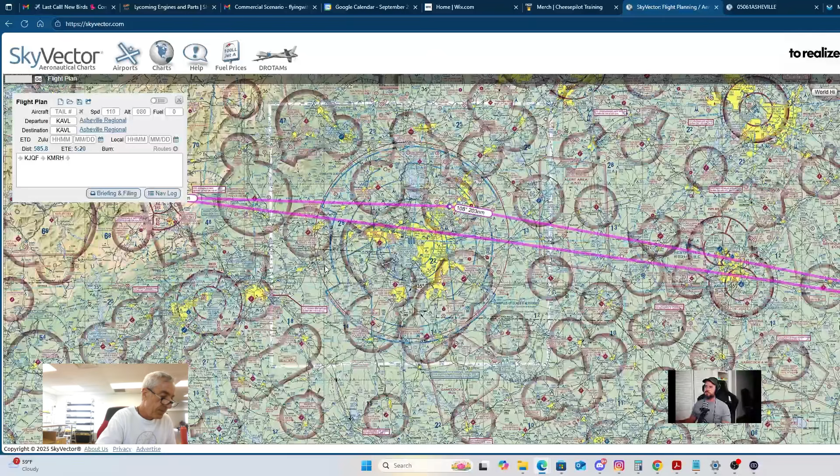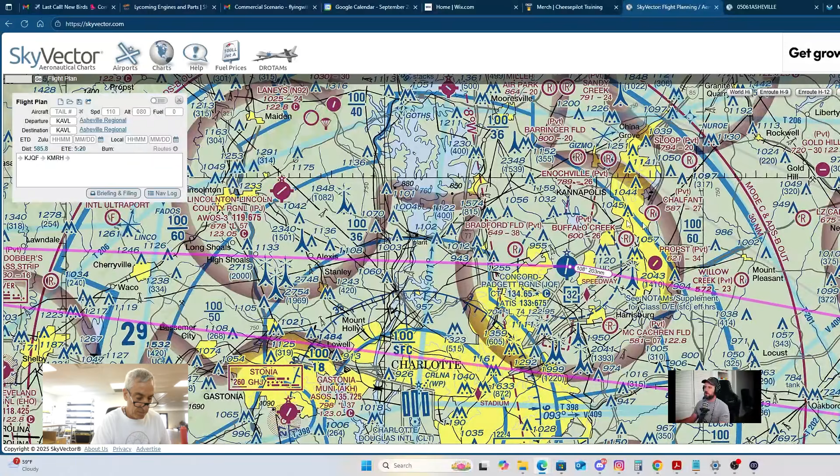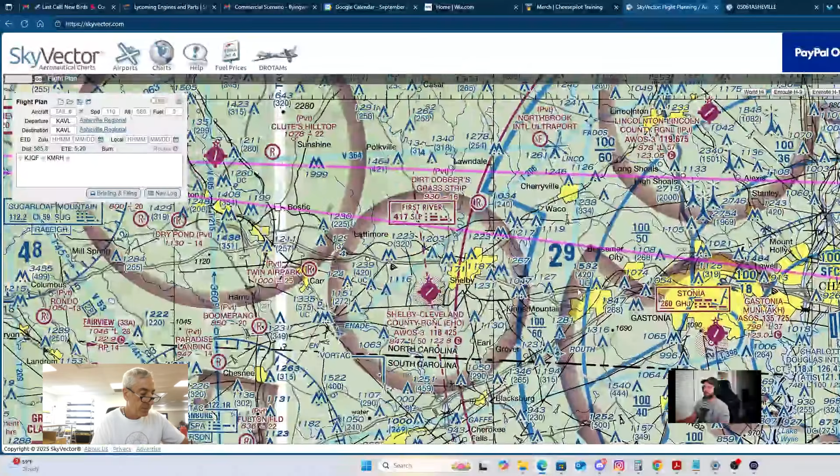Yeah, so I pulled it up on SkyVector. Given the GPS waypoints and stuff, it's kind of hard for me to put those into SkyVector. But this is effectively the route. You're going Asheville solo to, was it Sugar, Bradford? Oh no, Concord. Correct, Concord. You're picking up your buddies and going to MRH, and from MRH all the way back to Asheville. Correct. Okay. Go ahead.

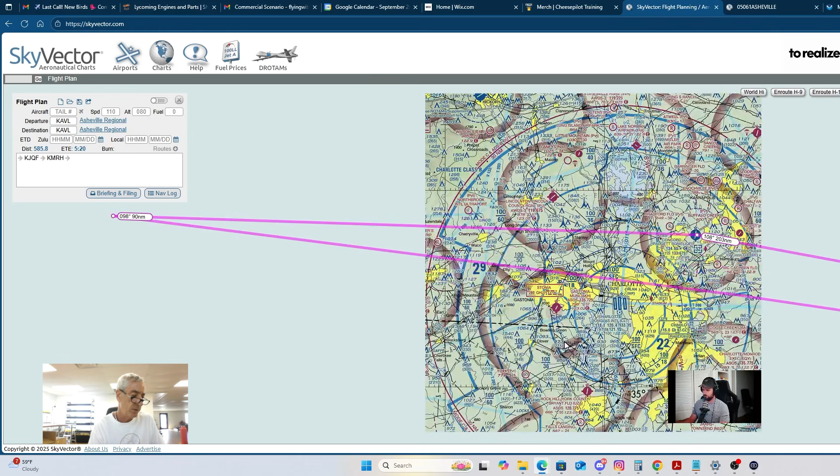And you see that you've got a Charlotte Bravo airspace right there above Concord. So that's why I took a route from KAVL to Sugarloaf VOR to BZM VOR, and then I figured they're probably going to vector me around anyways, because of the Class Bravo airspace. Okay. And what was the identifier of the Sugarloaf VOR again? Sierra Uniform Golf. Sierra Uniform Golf. And there it is.

Bravo Zulu Mike is your BZM, Barrett's Mountain VOR. Okay. And then I just set up some pilotage points, like, after I cross BZM, I'm going to turn right. I haven't looked at the heading, but it's probably a heading of 100. I've got Statesville there. Statesville's a little town. That's a good pilotage point. And then I've got railroads.

And then I figured they're probably going to, at a waypoint of Pigeti, vector me around, and they'll be in full contact with me, ATC. I always pick up flight following, so I'll pick up flight following with Asheville.

So yeah, that's why you see all of those longitude and latitude. Yeah. No, and I mean that's fine. Did the DPE specifically state like, hey, let's keep this VFR plan? No, he did not state that. But I just figured it probably was going to be all VFR.

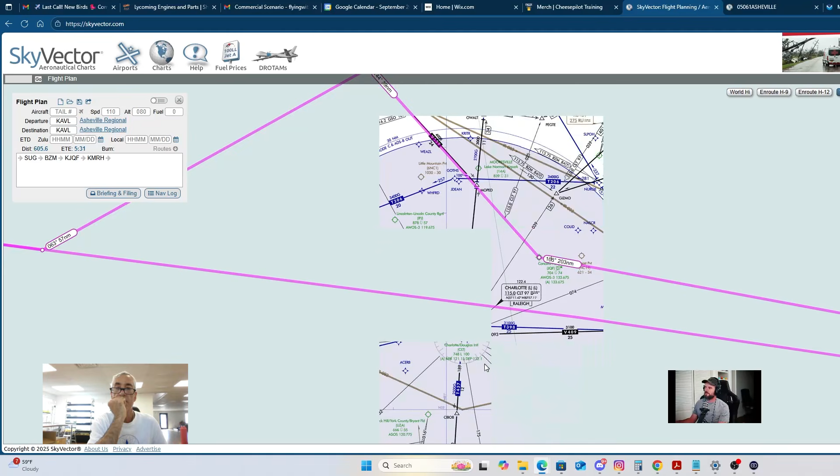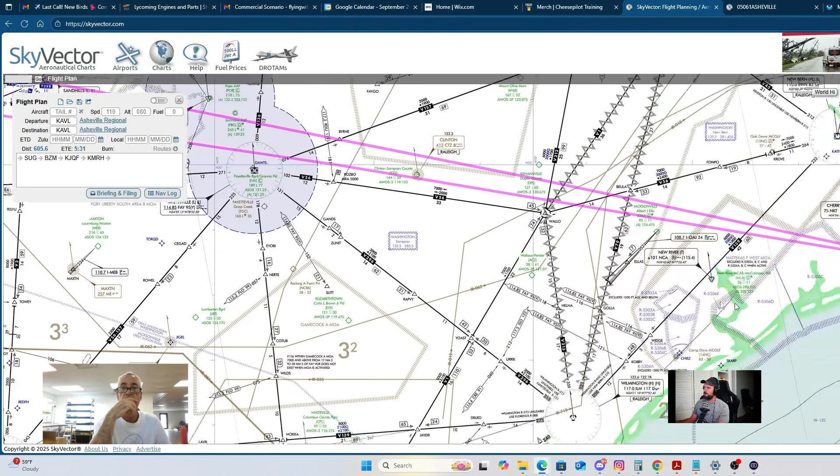I mean, with a route like this, I would have planned it IFR. Even if there is VFR weather planned, I probably would have done an IFR planning, because you're not trying to do a VFR-only commercial pilot certificate, right? You're trying to get a commercial pilot certificate that also includes your IFR privileges. Plus, there's a route that takes you pretty much right there. Correct. And there's even a route that'll pretty much take you all the way out to the other one. My personal preference would have been to plan it IFR. I see why you did it VFR.

Because, like, hey, commercial brings us back into the VFR world. We're doing all these VFR maneuvers and whatnot. Commercial is more looking at your decision making. It's less, oh, this is a VFR only ride, or this is an IFR only ride. It's kind of bringing it all back together. What is your decision? What is your choice?

Right. And if we're going to be circumnavigating Bravo and whatnot, I would rather be on an IFR flight plan that's going to get me in and out of Bravo easily, instead of trying to duck under all these different shelves and hope that they're going to give me a VFR clearance through the Bravo. Because if the Bravo's busy, they can tell me pound sand. Correct. If I'm on an IFR flight plan, exactly.

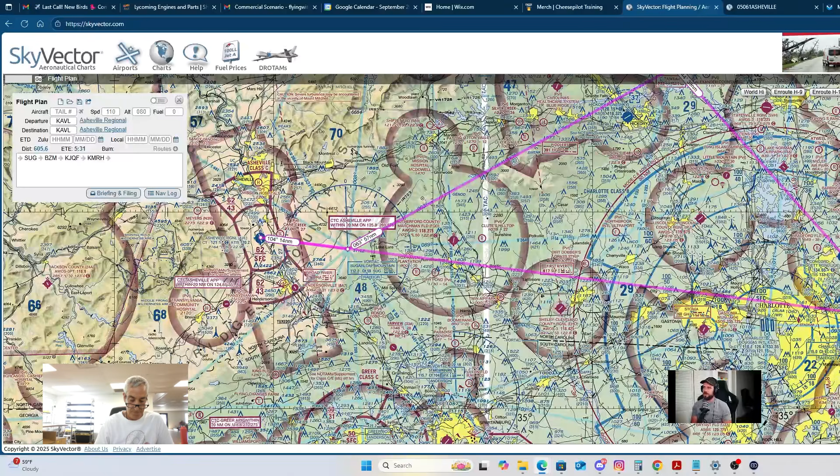Yeah, I didn't know I really had a choice. It didn't seem like that on the commercial side because everything was VFR. So that's good to know, though. Yeah, your maneuvers are all VFR. If the DPE wants VFR cross country procedures, it's very easy for them to take you off your plan, like, oh, we lost communications or something. It's very easy to build a scenario to get you out of the IFR environment.

But what we're looking for is, let's say somebody did approach you at the airport saying, hey, I need you to do this commercial flight for me. I need you to get me from point A to point B, point C with some cargo, blah, blah, blah. What's your planning behind it? Yeah, and the first question is, is it a business? It's cargo I'm picking up, business related. And if so, so on and so forth, like you said.

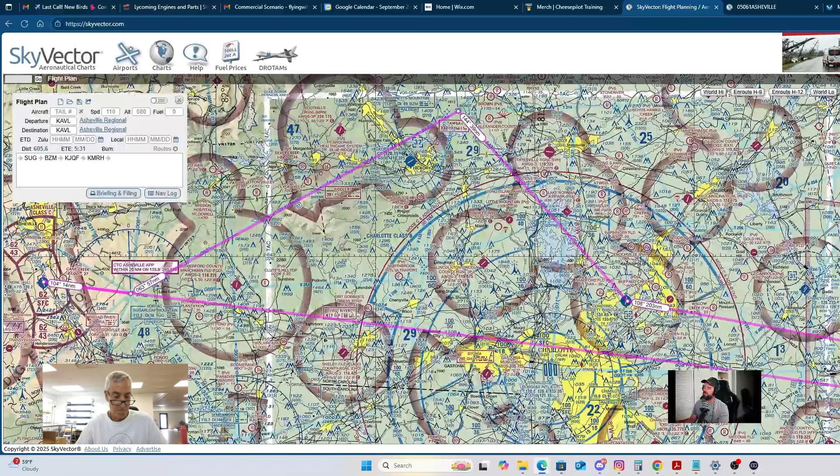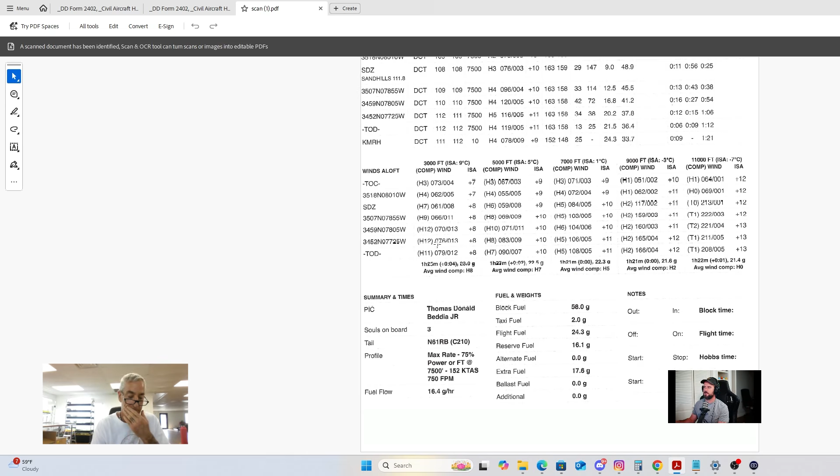Yep. But it wasn't a bad VFR flight plan. You get a decent altitude, 7,500 feet was the plan. Let me see if I've got it kicking around here somewhere. I did have some notes on it. I even wrote in the missing 185-pound friend, but we already talked about that. You had your intention, your top of climbs, top of descents. Again, these are ForeFlight generated, because at this point, what are we bothering?

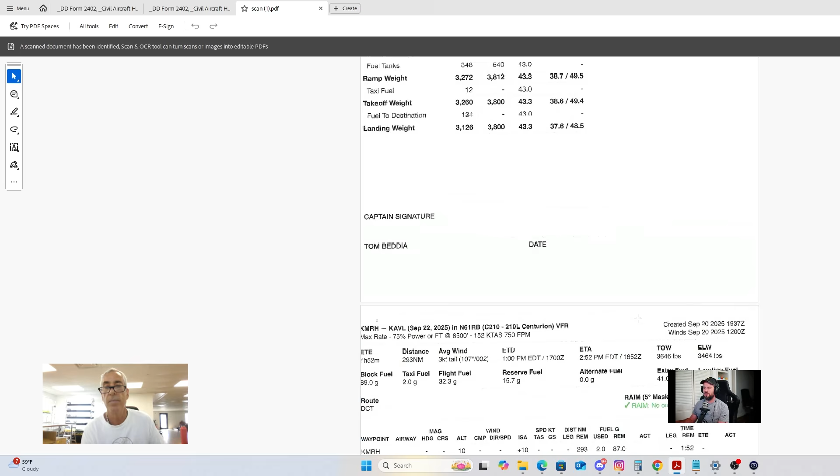The one thing I did see that might be a point of contention was the fact that you split the cargo at the end. Would it have been possible to not split it? Because if somebody's ordering 100 pounds of oysters, usually it's going to be in some kind of crate. Right, because the maximum weight that I can actually put in the rear cargo area is 100 and something pounds. Let's see, it's 120 pounds in the aft cargo.

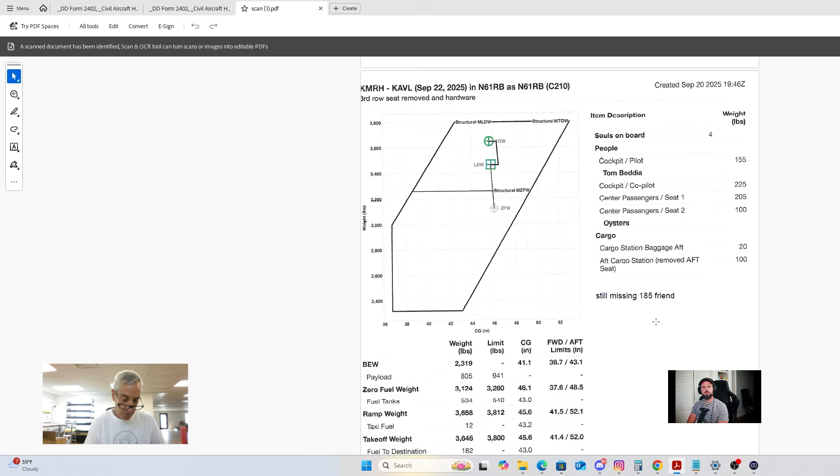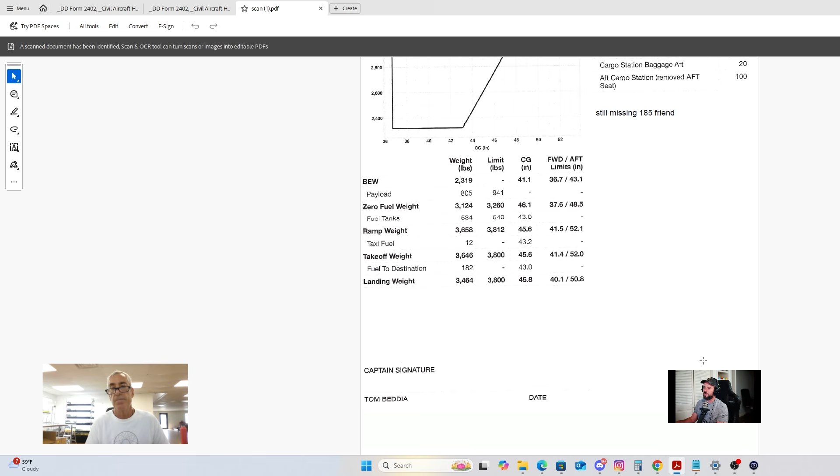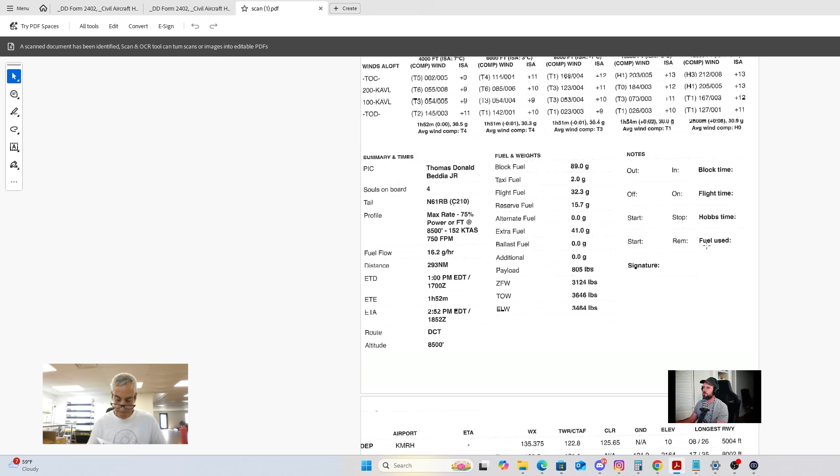Okay, so it was necessary to split the cargo, and that's probably another limitation they want you to recognize in the Cessna 210. Are they able to recognize that they can't just shove 200 pounds in the cargo? Correct. Awesome. So solid decision making when it came to getting rid of the friend that wanted to come along just as a joyride. Solid decision splitting the cargo.

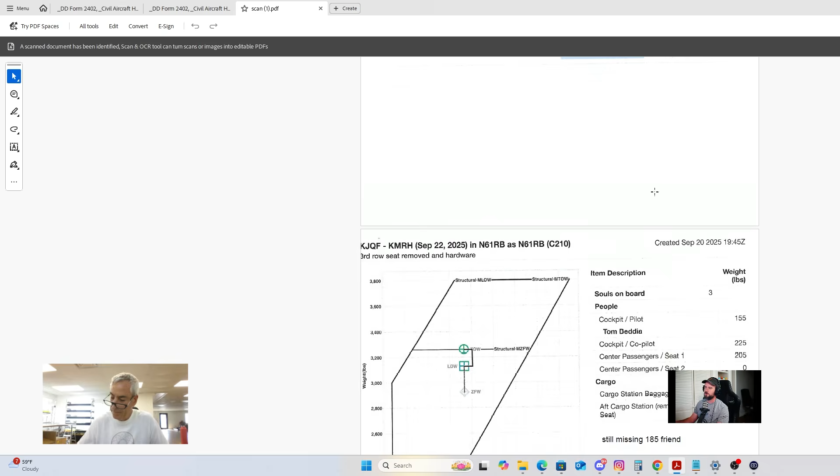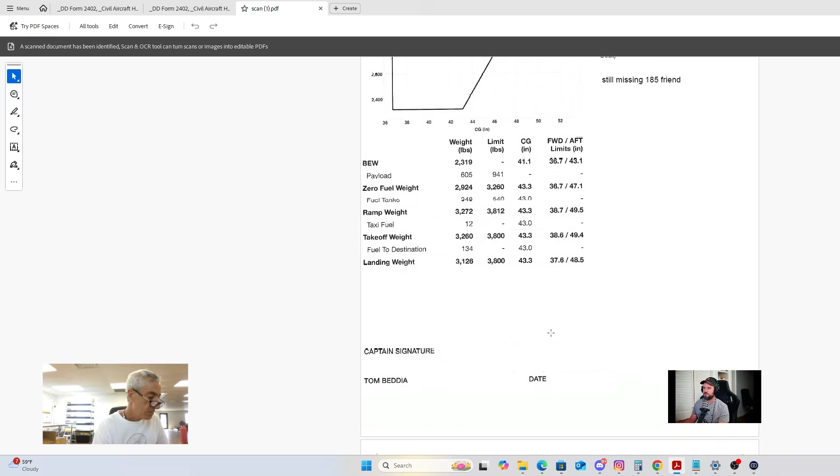I wouldn't have done it VFR. I would have done it IFR, especially circumnavigating a big old Bravo airspace like that. It would just make it less work for you, is really what it is. Correct, because they'll clear me right through it, most likely. And even if they don't clear you right through it, how much fuel were you going to burn for this route? Let's see. Flight fuel, 32 gallons out of the 89 that you planned for. So it's about half your gas. You still got, what was the time?

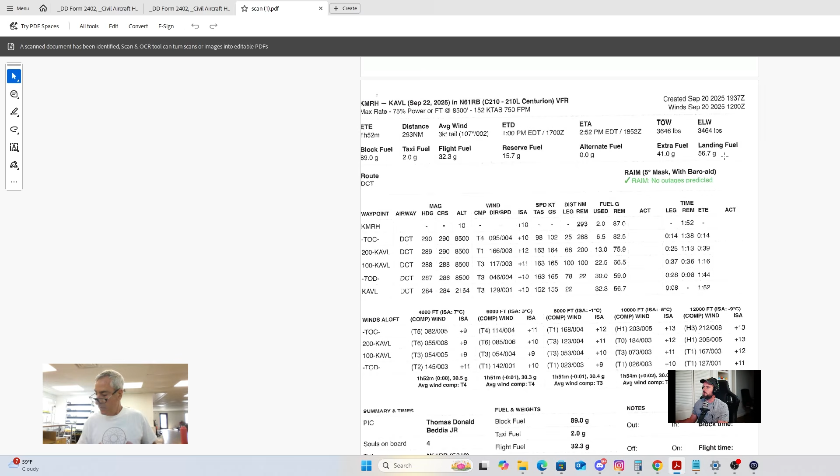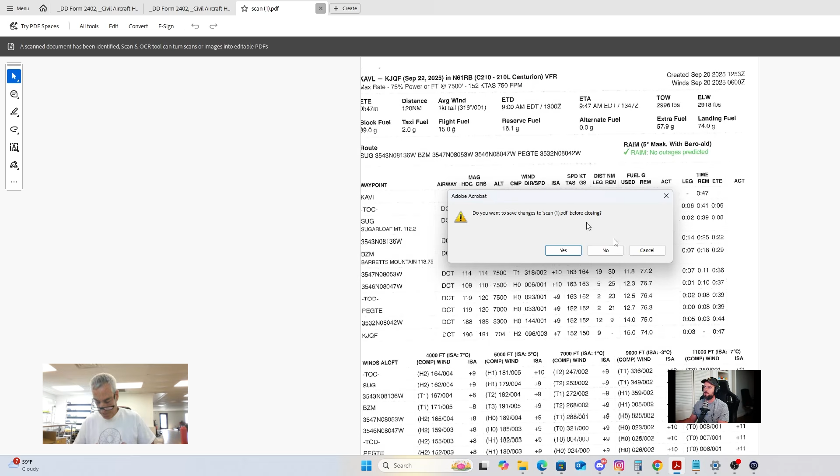Extra fuel, landing weight. I had 2 hours, so you still had another 2 hours of fuel. So I wouldn't say that you're obviously being cautious with fuel, having extra fuel isn't ever a bad thing. Just keep in mind that, I mean, you're not actually going commercial. You're just doing this to kind of make yourself better. Right? If I remember correctly. Mm-hmm. Definitely.

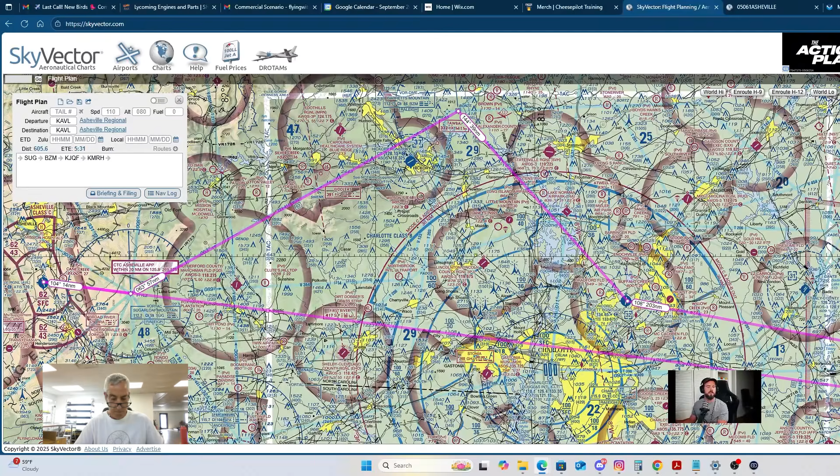What I would say is, I like your plan. You're cautious on fuel. You're more cautious than me, but it might be a matter of experience, or just you'd rather make that extra fuel stop. Yeah, because basically, I'm just picking up fuel in Beaufort while I'm getting the oysters. So I mean, it's like just top me off while I'm here. Yeah, and that makes complete sense.

I didn't see any NOTAMs that would give you any issue. The only NOTAM I saw was that there was a departure procedure out of one of these airports that you need RNAV because the VOR is out of service. That's probably Sugarloaf. Sugarloaf. SID out of Concord because the Sugarloaf VOR is out of service. So there wasn't really any NOTAMs that I would have been too concerned about.

I know when I checked the weather, I was thinking that we were planning this off of today's weather. I was a little nervous about the VFR only because there's a lot of bad weather going on today. But if this was based on stuff from days ago. Yeah, it's probably on the East Coast. The weather on the East Coast we got to worry about because you got all those tropical storms pushing up through there. Yeah, I mean, right now at AVL, it did get a little bit better. Well, MRH scattered at 1700. Oh yeah, it did get a little bit better.

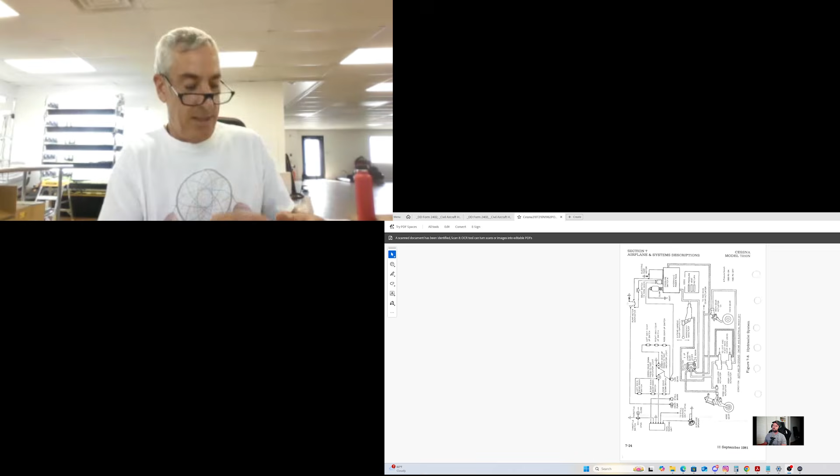We'll even show the viewers what we're talking about. So this is the POH, right? This is the gear. I just went and Googled a Cessna 210. It's interesting because my POH is like 50 pages, if that. I got my electrical system diagram, fuel system diagram, but it doesn't give me the gear system. Everything's all verbal about the gears, gear doors. Well, let's go over this one then, since I've got it up.

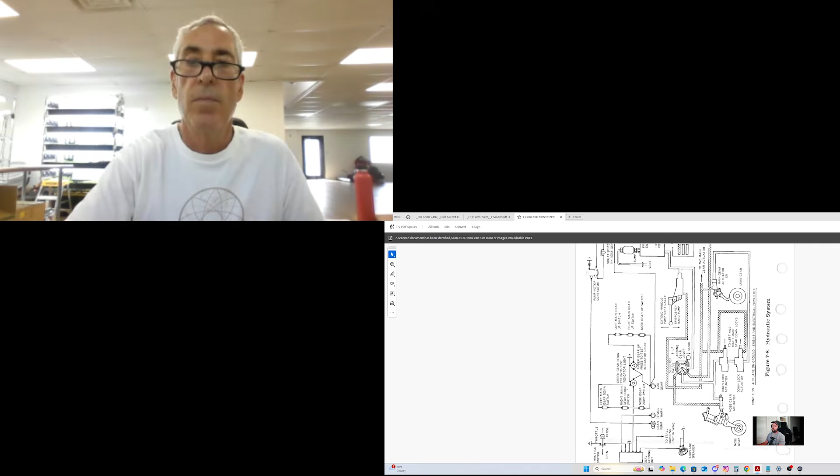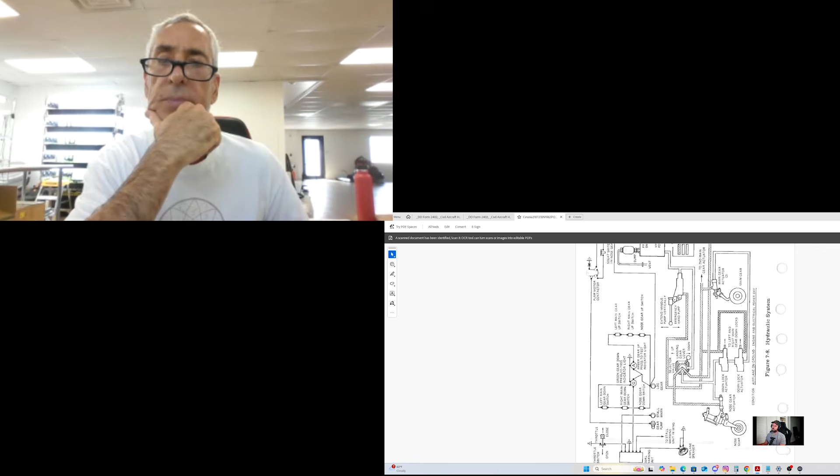They didn't change much in most gear indication systems, especially single light gear indication systems are all the exact same. The dual warning system is probably a newer thing your airplane doesn't have. But this is your gear uplock and downlock switches. You should be able to see these during your pre-flight, especially since your gear doors are gone, stick your head up there and see these little switches. Yeah, that's one of my pre-flight inspections, to look up in the gear bay area. And these little switches should be near your locks, right?

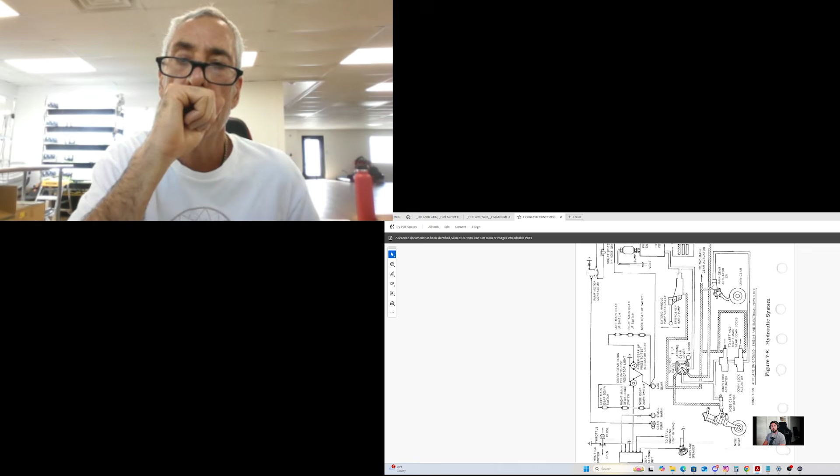So let's look at how they're wired together. They're all wired in series. So if I've got power that comes through this line and goes through all of these switches, if one of these switches has failed, will I get an indication to show me if my gear is up or down? No, it doesn't look like it. Yeah, because it'll break the circuit. It won't let the circuit continue. Awesome.

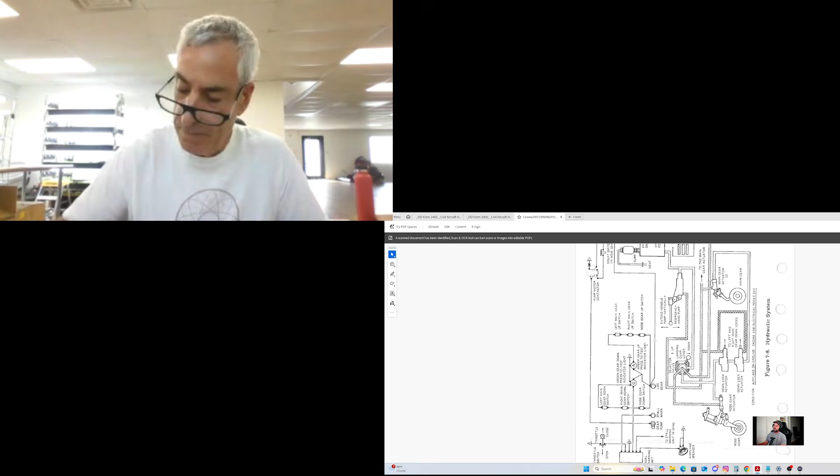Now let's go on the flip side and take a look at the hydraulics. So we talked about the electrics. If I was to talk about my gear system in this airplane, I would say that it's electrically controlled, hydraulically actuated. Would you agree? Correct. Because when you flip your landing gear switch, you're flipping a switch, not controlling a hydraulic valve. So it's electrically controlled. But then your hydraulic system comes in and does its fun little thing and actuates the gear.

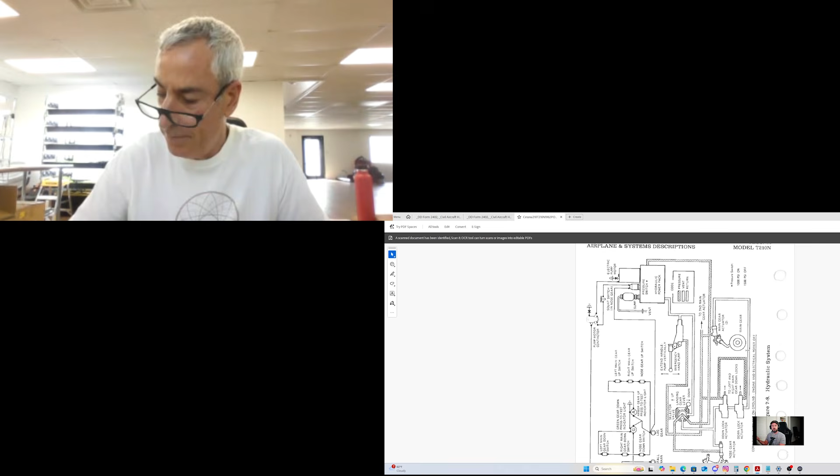Some airplanes, like mine, are hydraulically controlled and hydraulically actuated. When I swing my gear handle, I'm actually controlling the valve. My handle is the valve. But you have a switch. Correct. So you've got a selector valve right here. Do you actually have a handle that looks like this, or is it just a switch? It's just a switch. So you said you had an emergency extension pump. Do you have any kind of valve or switch that you actuate when you need to use this pump? No. Okay.

You can see it's pretty free flowing there. So let's say when you pull this handle out, when you pull out...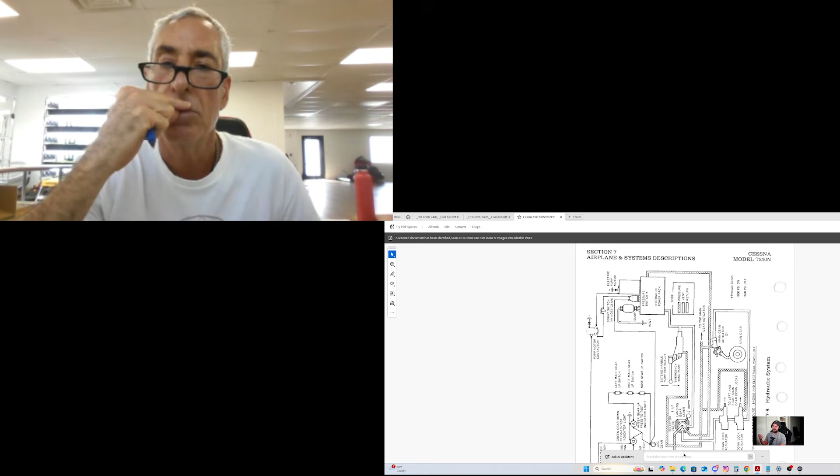I'm trying to think, if you've got an electrical failure, how are you going to actuate this gear? A lot of gear systems, right? If you have an electrical failure, let's say your alternator dies, your battery dies. How are you going to get this gear down?

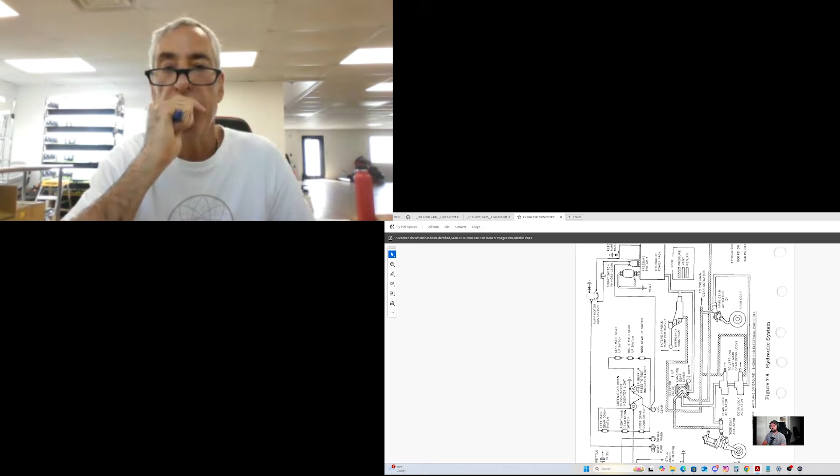The step I would take is I would put the electrical switch, which is the landing gear switch, right here, down in the down position. And then I would go ahead and pump it with the manual pump to get it down. It takes a while, it takes a little bit of time to do it.

So hydraulic system, see figure 7-8, supplied by an electrically driven hydraulic power pack located behind the control pedestal. The power pack only functions to supply hydraulic power for the operation of the retractable landing gear. This is accomplished by applying hydraulic pressure to the actuator cylinders to extend or retract the gear and operate the down locks.

The electrical portion of the power pack is protected by a 35 amp pull type circuit breaker. The hydraulic power pack is turned on by the direction of actuation selected by the landing gear lever when it's placed either in the up or down position. When the gear is fully extended and locked or retracted, a series of electrical switches will illuminate one of two indicators on the instrument panel showing the gear position. A hydraulic pressure switch will automatically turn off the power pack when the hydraulic pressure reaches a preset value.

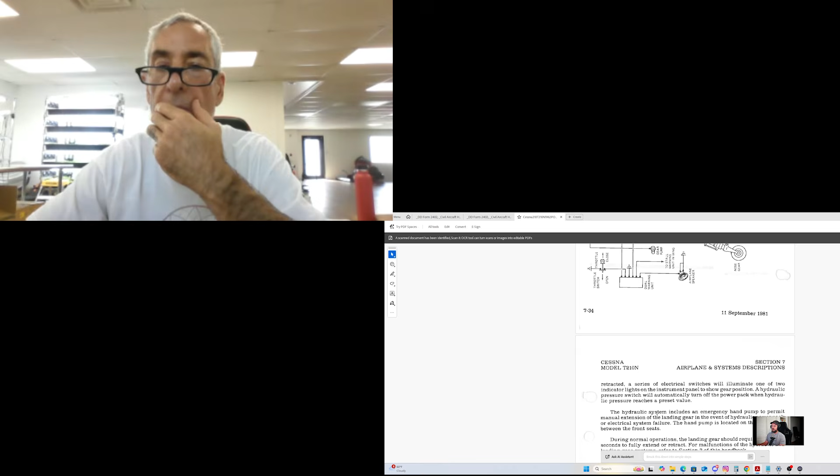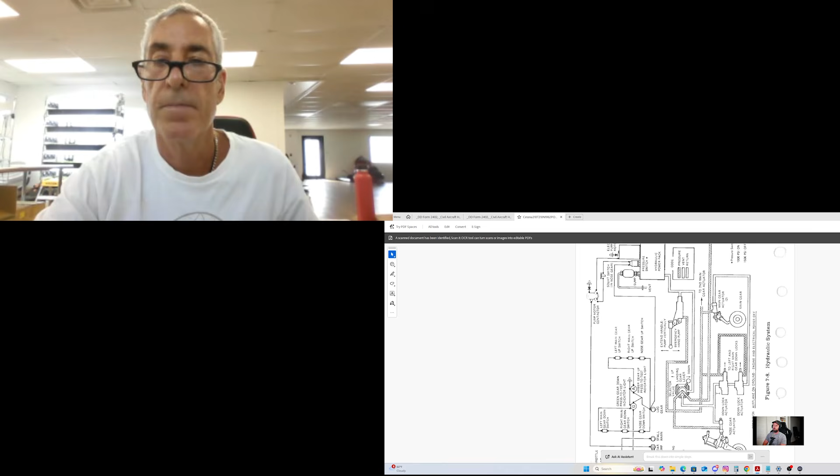Is that kind of what yours sounds like? Yes, it does. What it seems like to me is, based off of this Cessna 210 POH that I'm looking at, is that your landing gear switch and handle are the same thing. That when you throw that switch or handle, whatever it is in your airplane, it's an electric switch that tells the power pack to turn on. Correct, yeah, I see that. But it's also moving a valve directing the pressure to either the up or down side of the actuator. Would you agree? Yes.

I wish I had that schematic there in the book. That'd be nice, I'll share that. And again, this is a POH I just Googled. What I would dig more into is I would try to figure out exactly what your airplane has. Go talk to your maintenance, go talk to your mechanic, because this is the POH I found.

It's a 1982 turboed Centurion Cessna 210, right? So it is a different model than yours, but I wouldn't see that the gear system would be that much different. I don't think so either. But again, I've not been in your airplane.

But these are the kind of things that you should know, right? If I'm looking at a POH that's not accurate, you should be able to correct me and say, oh no, my airplane's a different model, my airplane has different systems, this is how mine functions. Yeah, I'm right there with you, I want to know more about it for sure.

So if you don't have the diagram, go look at the system, go talk to your mechanic. Your mechanic is going to have an idea on how this system functions, because they need to make sure that it functions during the annual. How do I know it functions if I don't know how it works? Right, yeah.

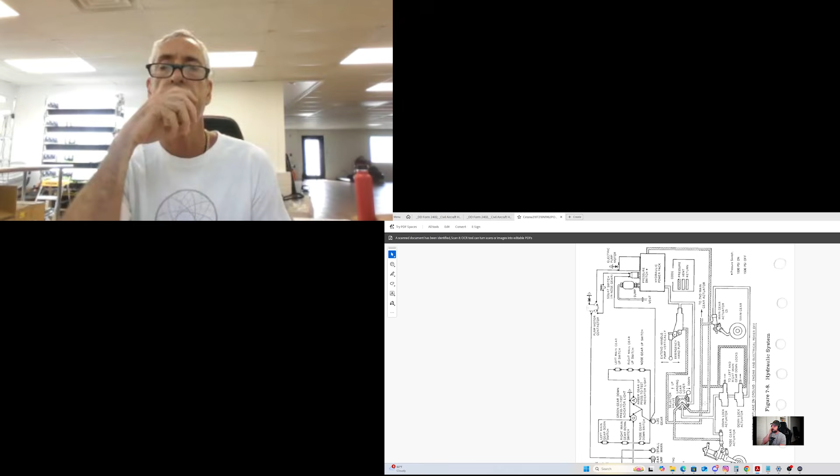Most general aviation gear systems, if they are entirely electrically controlled, you're going to have a mechanical valve backup that will either relieve pressure throughout the entire system so that you can swing the gear down, or so that you can pump the gear down, if they are entirely electrically controlled. Based on this diagram, it looks like it's electrically and hydraulically controlled, and hydraulically actuated. So the electrical system controls your power pack and controls your uplock and downlock, while you have a hydraulic lever that directs the flow either to the up or down side of the actuators. Okay, can you bring the gear up on the ground?

No, because from what I remember there's a load bearing switch on there that when it's on a load, you cannot bring it up. Okay, so the weight on wheel switch, right? I just didn't know, that's what I was told early on. I mean when I first got it by the text, so it's like okay, yeah, and that it should, right? It should, definitely it's good.

It seems almost like your electric gear switch also, this is accomplished by applying, yeah so it almost seems like your electrical portion of the switch is going to control the down locks. So you might be able to apply pressure on the opposite side, on the upside of your gear system, by throwing your handle, but that squat switch should prevent your power pack from applying pressure, yes, and your squat switch should also prevent the down locks from disengaging. Right, yeah, that's based on what I'm reading on this.

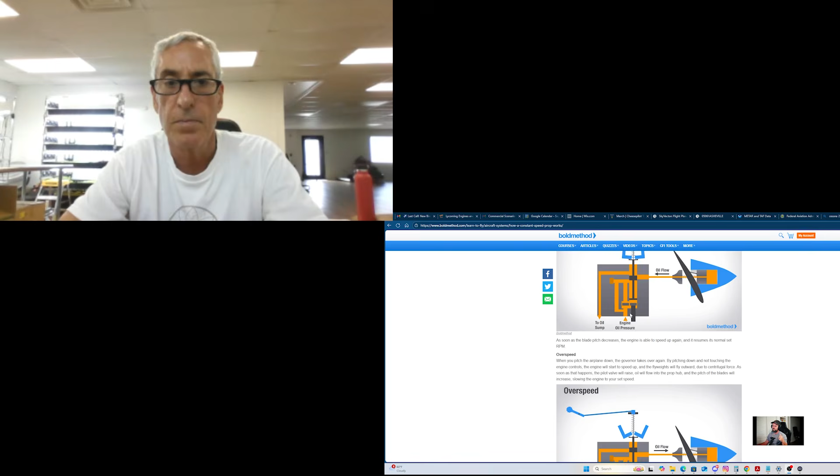So let's say that happens, for example, if I am out cruising around and I pitch the airplane down, okay? I pitch the airplane down, the airplane's now flowing through the air easier because it has gravity to help it down. Well, that's going to cause my engine to start to speed up. You remember back from flying your Cessna 172 or something with a fixed pitch prop, if you'd push down and you didn't adjust the power, the RPM would rev up.

Right? Well, this is kind of the same idea. If you're flying around with a constant speed prop, you push down, the RPM starts to rev up. But then the governor right here, the flyweights swing out, allows oil into the hub, gives you a steeper pitch prop, slowing the blade down. Now, slowing the RPM down.

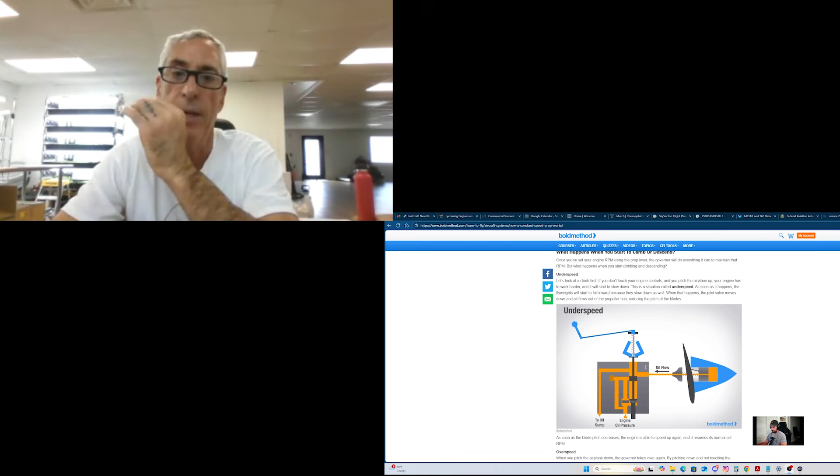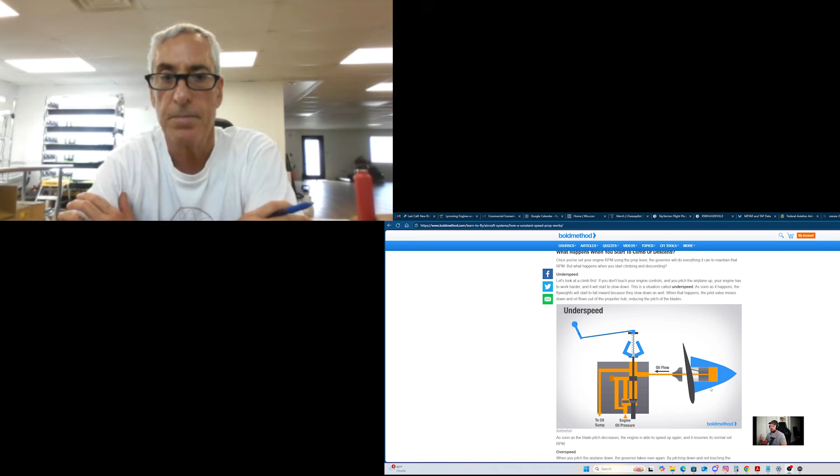Yes. But then you've got your underspeed scenario where you start to, let's say, pitch the airplane up without adjusting power or RPM. Right. In your old school 172 or 150 or what have you, the engine would just slow down. Right. In this, we're trying to maintain that optimal RPM.

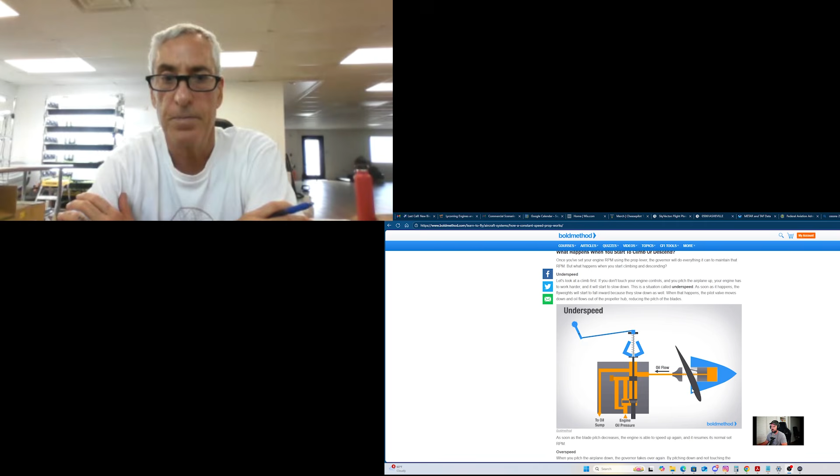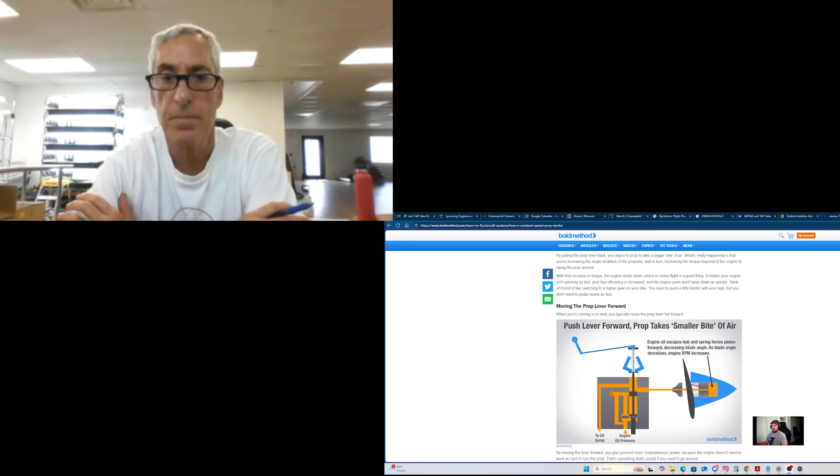Yep. So it's going to give you a smaller bite of air, or it's going to give you a shallower pitch on the prop, making it easier for it to run. Correct. But as you can see, pushing the prop forward, right, the flyweights, pushing the prop forward gives you higher RPM.

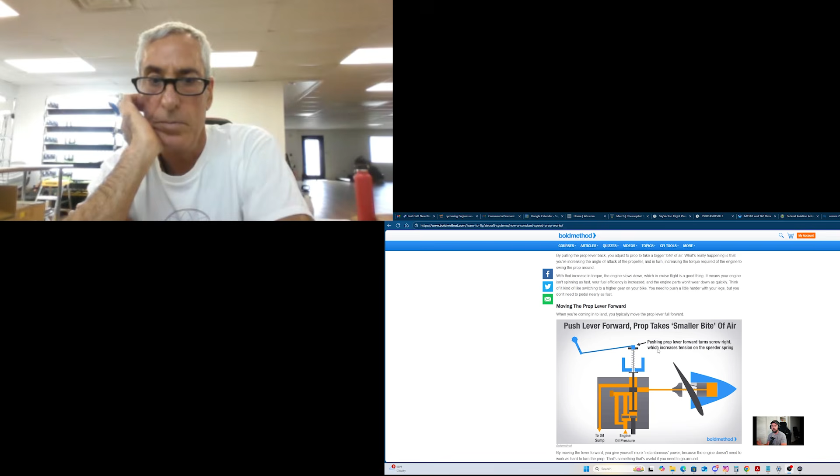Well, it's giving you higher RPM because it's setting a greater tension on that speeder spring, meaning it requires a higher RPM for those flyweights to swing out to neutral, pushing the pilot valve down. Right. I see.

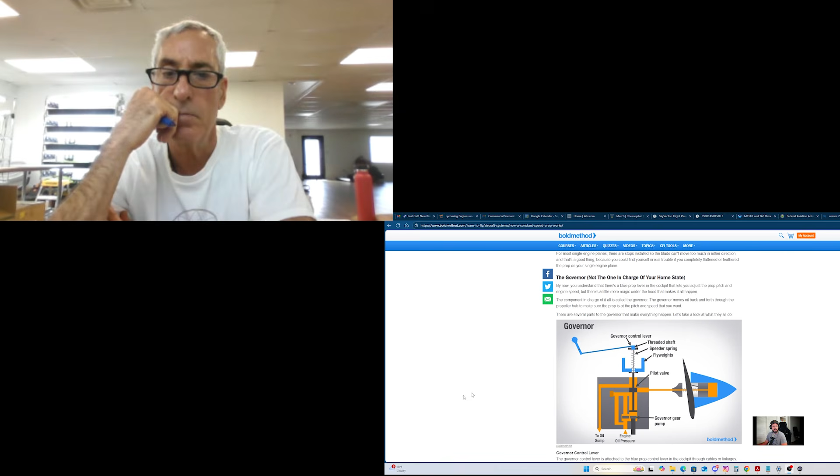And then on the same, right? Right. Now, why? What's the point? Like, why doesn't every airplane just use a fixed pitch prop? What is this doing for me?

Well, it's helping you manage those situations that you can get in with a fixed blade prop. You know, the overspeeding, underspeeding. I would say it saves your engine, and it also it's more fuel efficient. You know, for fuel economy, efficiency.

And I don't know, I'm thinking, you know, and also manifold pressure too. It coincides with manifold pressure too, I would think. So if it's a fixed blade, you could ramp up your manifold pressure pretty high if you're running a higher RPM with the plane, you know, in an overspeed situation. I'm just taking a stab in the dark on this one, but that's okay. Kind of going through my head on that.

So engines, they generate power at a specific RPM, right? Correct. Like they want to live at a specific RPM. You know, on your car, you don't generate its full performance or its full horsepower at idle, right? You have to give it some RPM before it gets to its really, its power band. Right. That's what we're trying to accomplish with a constant speed prop, is just keeping the engine in its power band where it wants to live, where it wants to have its best performance.

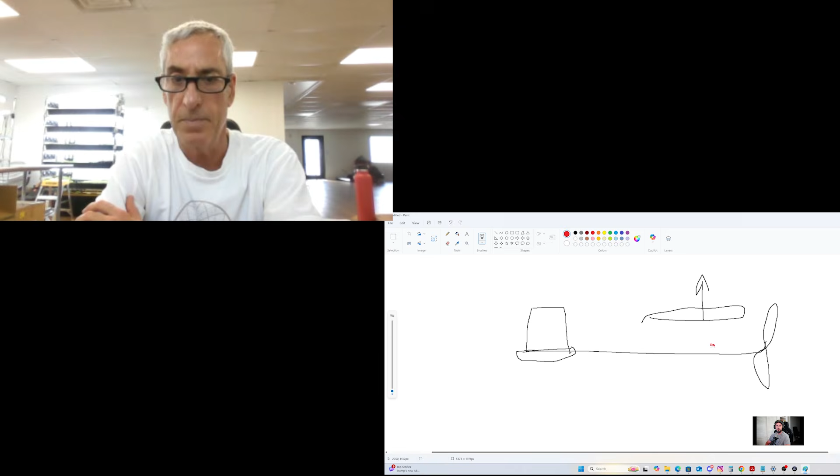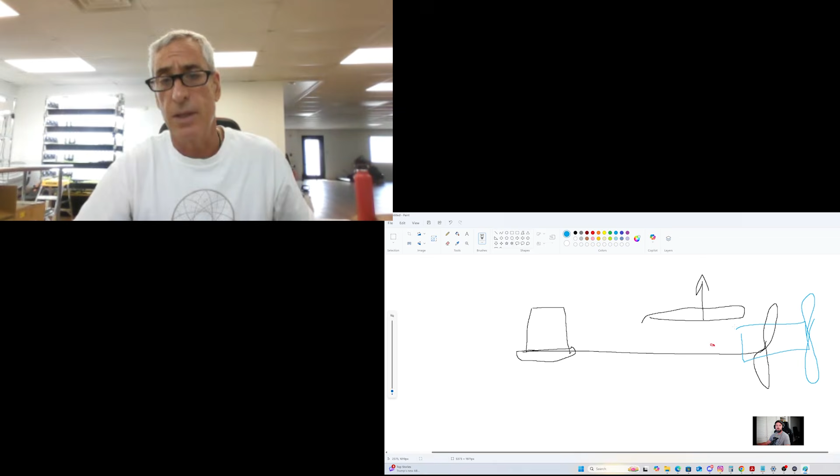Well, here in your Cessna 210, you've now got this big old 6-cylinder 540 hanging off the nose, because it's a 540, isn't it? It's a 520. Okay, either way, big old 6-cylinder. The big 6-cylinder fuel injected. They even put the battery right up against the firewall too. For the 182, the battery was in the back of the plane, aft. So now you've got your CG, let's say, right about at your knees, as opposed to right behind the seat. So it's farther away from that center of lift.

Correct. Now, with my CG being so much farther forward of my center of lift, what might this do to my cruise speed? It's going to decrease your cruise speed. Now, why is it decreasing my cruise speed? Because you've got to hold the nose up on the plane. Okay, so I've got to hold the nose up. That means my tail's got to work harder, right? It has to generate more downforce. When my tail generates more downforce, what else does it generate? More drag. More drag, right?

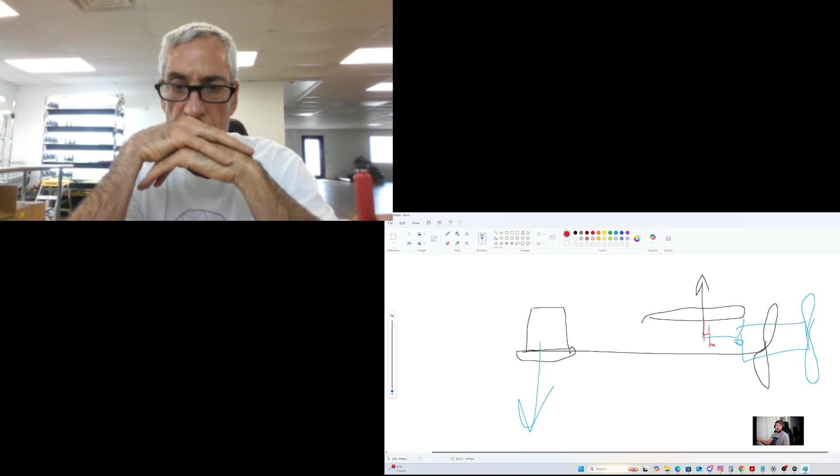But the other component of this is the separation between the center of lift and the center of gravity. So if I've got a center of lift that's just barely away from my center of gravity, we can look at this distance as almost like a lever that my center of gravity is applying to my center of lift. Since I've got a short lever here, my center of gravity isn't really applying that much of a moment. Let's say that this is 10 units of arm for 10 units of weight. I now have 100 units of moment being applied to my center of lift.

Now let's say, instead of this 100 units of moment, we've got a longer arm right here, and say it's still the same 10 units of weight. I now have 1,000 units of moment being applied to my center of lift. So since I've got a much greater moment being applied to my center of lift, my lift needs to be greater. How do I make more lift?

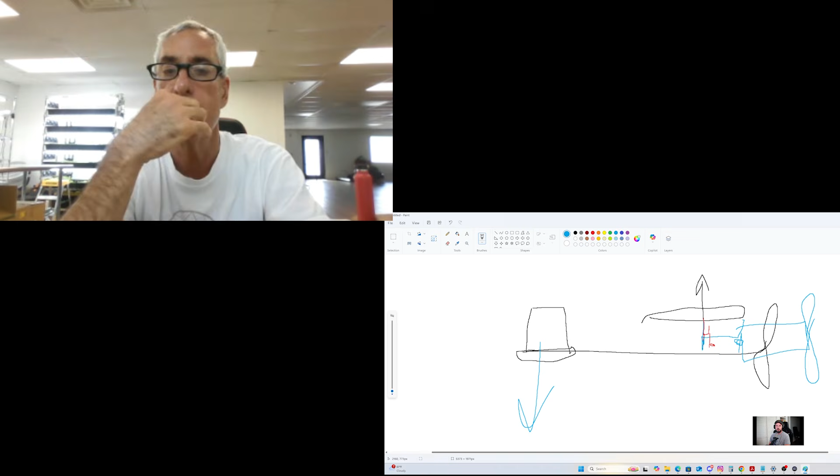You've got to add more power. Well, I can add more power, which is going to give me more speed. Let's say same speed, 110 knots either way. How am I going to create more lift? I've got to increase my angle of attack a little bit. And when I increase my angle of attack, what do I increase? You're going to increase lift and drag. Exactly. So since I've got more drag to counteract, that's where that whole 'I need to increase power' comes from, right?

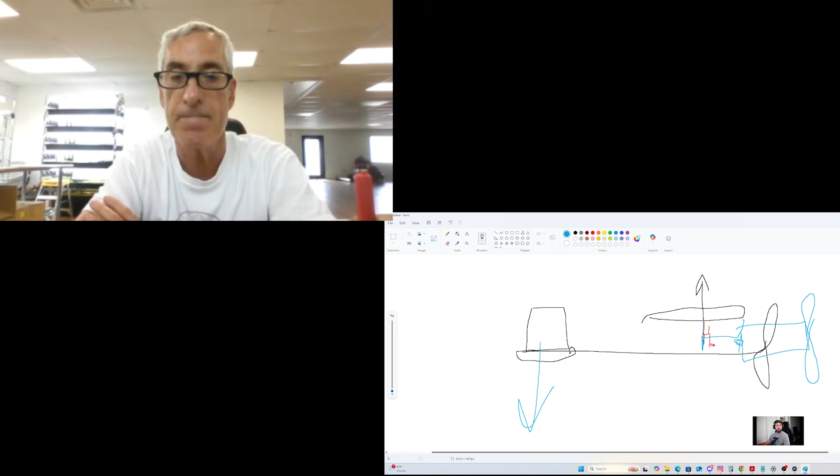And it wasn't that having to increase power is necessarily wrong. It's just we had a couple more steps I wanted to talk about before we got to that. That's great. It's so easy to just jump so far ahead, and all those little pieces in between are critical pieces too. Awesome.

So far what I'm really going to say is your route planning wasn't necessarily bad. The in-the-moment planning is fine. I'm comfortable that you know how to build a plan, make an adjustment to a plan you've been given, and explain why we made this adjustment instead of, oh, I don't know, I didn't want to do that. You had a solid understanding there. And the lack of systems knowledge might be more attributed to the lack of resources available for your aircraft.

It has been. Even the CFIs are just like, we really don't know where to go with this plane with the maneuvers. So we spent hours and hours figuring out, what's the maneuvering speed going to be? What's your best glide actual speed should be on a 180, accuracy landing, and also in the engine out procedures and things like that. So it's really helped me gain a lot more knowledge because of that versus just having a 182 owner's manual and going through it. Exactly.